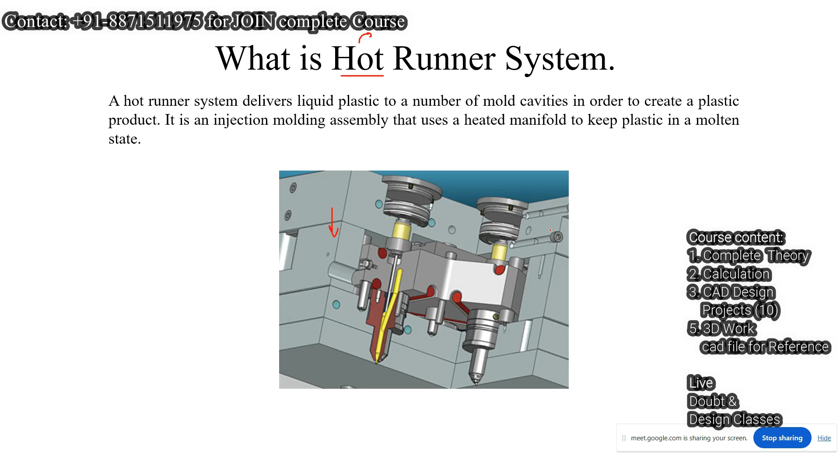If we use this hot runner system, the mold will not produce the feed system, so we will get the component directly. This complete apparatus or mechanism, you can say, we have to select.

In the previous lecture we discussed about the mold which has a manual type of hot runner. We have the semi hot runner, which is like an Indian jugaad, you can say. But that type of mold we cannot use, that type of mechanism we cannot use.

So for this, some companies are working on the hot runner apparatus. We have to select from there. So basically, what is the function of the hot runner? Hot runner means it will keep the plastic in the liquid condition.

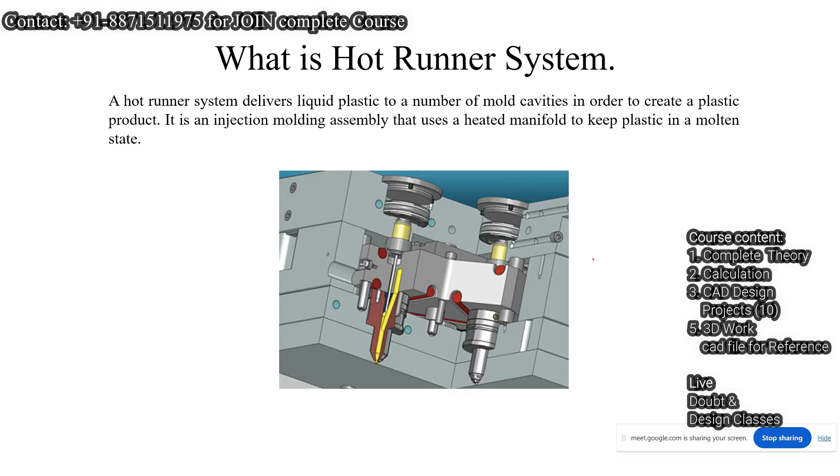So basically, if we use the hot runner system, the mold will not produce the wastage.

Here you can see the element into the hot runner. What is the element which we will use into the hot runner? This is the connector box. What is the purpose of this connector box? Maybe electrical wiring. Yes, electrical wiring. This connector will supply the electricity into this manifold, a complete manifold of the system. And this is nothing but the top plate or the fixed plate.

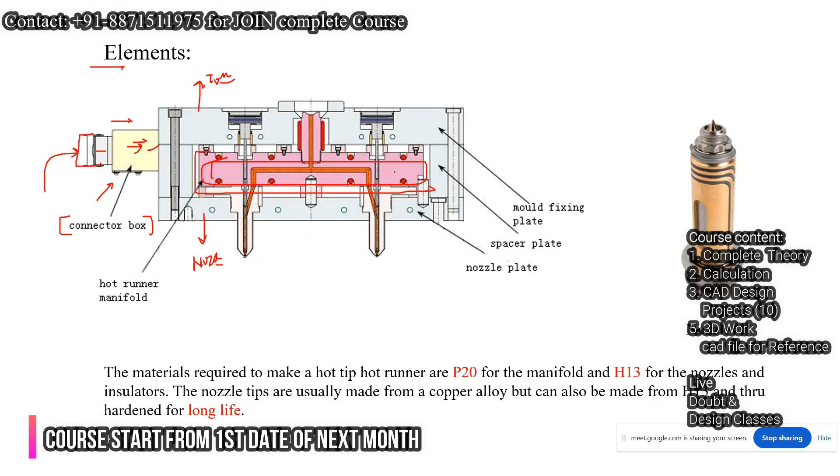Or this is nothing but the nozzle plate. And this whole system which is inside this box is known as the manifold. So hot runner manifold. Into the hot runner manifold we have to use this nozzle.

Now, talking about the material required to make the hot tip or the hot runner, generally we use P20 for the manifold, and H13 for the nozzle. But as I told you, depending upon the company specification or the company catalog, they can use their own material, but they will provide the efficiency for the nozzle or for the manifold also.

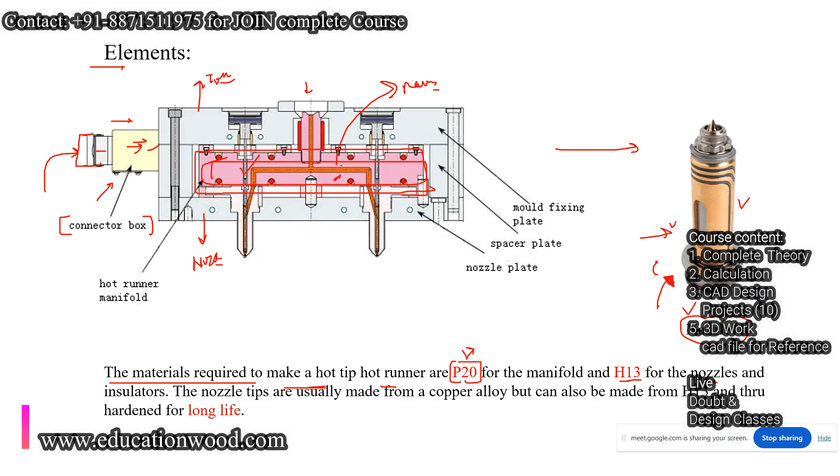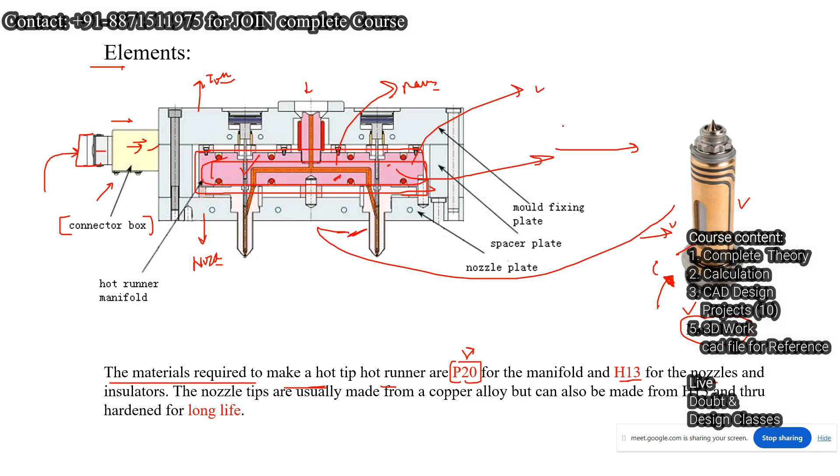So we can prepare this manifold ourselves, because this is nothing but a plate in which we have to implant this nozzle. So the manifold we can create as our housing, but it is quite difficult, though we can prepare it.

But somehow, as I told you, we should take it from the company itself. We should not try manufacturing this because there is an issue of the material, the thermal property of the material. That's why we should take the complete system from the company.

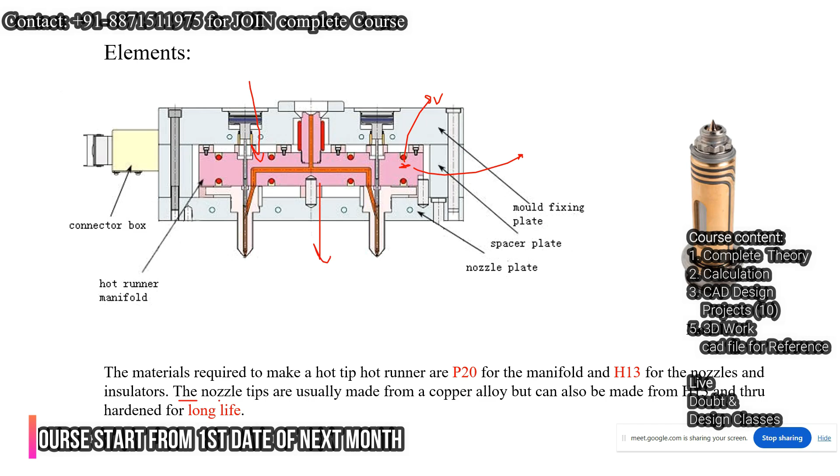As I told you, the nozzle tip is usually made up of copper alloy, see here, but it can also be made from H13 through hardening. If I am talking about the insert, for example this is the nozzle, so for the replica I have to provide the complete insert for this. This will be the insert. So what will be the insert material? We have to use insert material H13.

But for example, if I have to machine it like this into the insert, this machining is very difficult. So for that, sometimes we cannot use EDM machining here. Why can't we use EDM machining sometimes? Because EDM produces heat, and because of this heat, this material or this portion can become brittle. That's why during the operation of this hot runner mold, it can develop cracks.

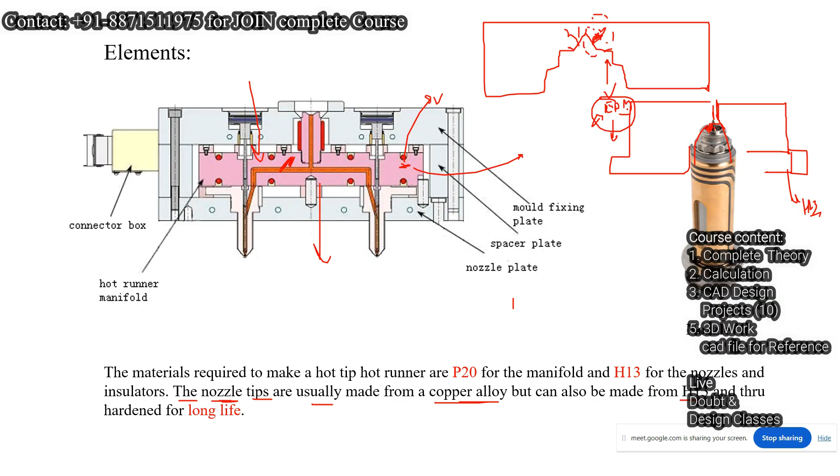That's why we have to avoid EDM machining during the manufacturing of this insert. You should understand these things. Is it clear? Now, as I told you about the nozzle...

So, the general rule for selecting the nozzle or gate - what is the criteria for gate selection or nozzle selection? For example, in a pinpoint gating system, how do we decide the gate diameter? This is the cold gate runner diameter.

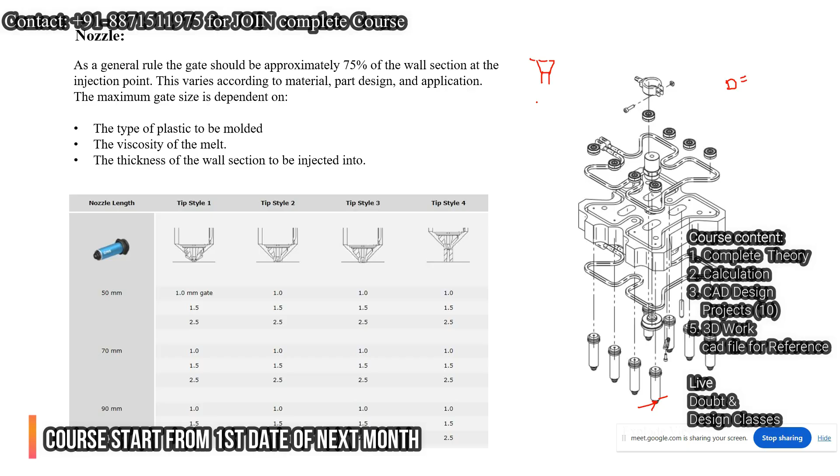So basically we can calculate the diameter. As a general rule, the gate should be approximately 75% of the wall section. For example, if the wall thickness is about 2mm, what will be 75% of 2mm? It comes to around 1.5, so we should take 1.5 diameter.

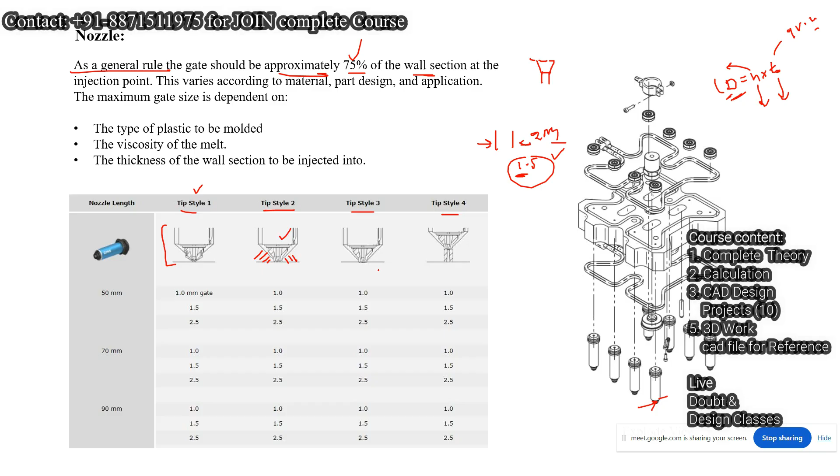So here you can see different types of styles available for the nozzle - tip style 2, tip style 3, tip style 4. Now depending upon the component, we have to use the appropriate style. For example, if we need some space, we use style 1, style 2, or style 3, but here you can see tip style 4 is used for a different purpose.

For example, we have a component like this, and the customer says, sir, we don't want any mark at the top of the component. Then what do we have to do? We have to prepare a runner and provide edge gating.

Where will be the position for the hot runner? See, this will be position 1, and this will be position 2. So basically the material will flow like this.

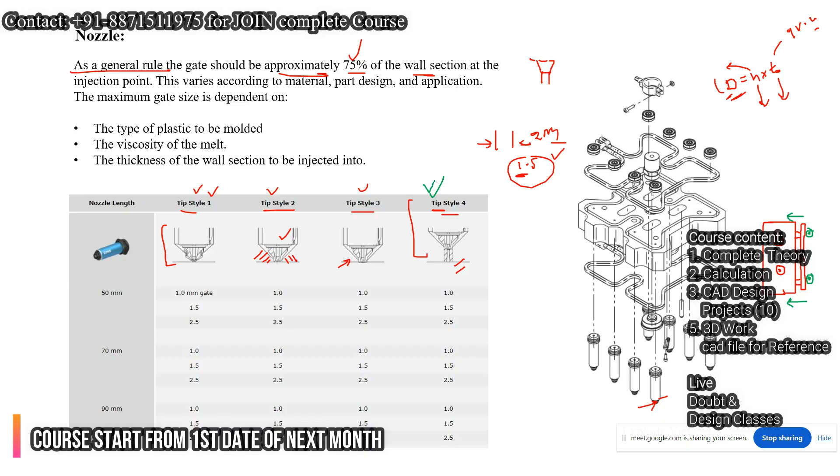As I told you, depending upon the requirement, we have to use the appropriate tip style. For example, if we need some space, we use style 2 or style 3. If we don't need space and want to directly touch the component at 0.5 or 1mm, we can use style 1.

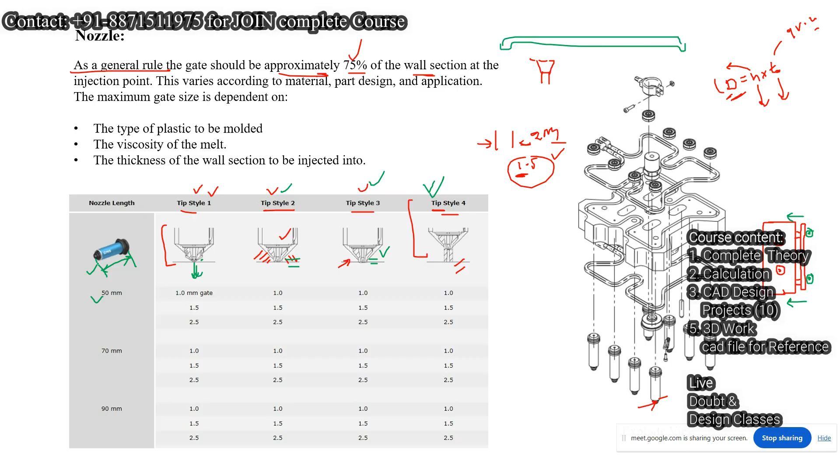Now here, you can see this is the length. This length again depends on the component geometry. For example, if the component geometry is like this, we can use the minimum length - right or wrong? So there's no requirement for more.

For example, if the component has a structure like this, with this kind of section, then I have to provide one nozzle here and a second nozzle here, for example. Then I have to use 50mm as well as 90mm, just as an example - right or wrong?

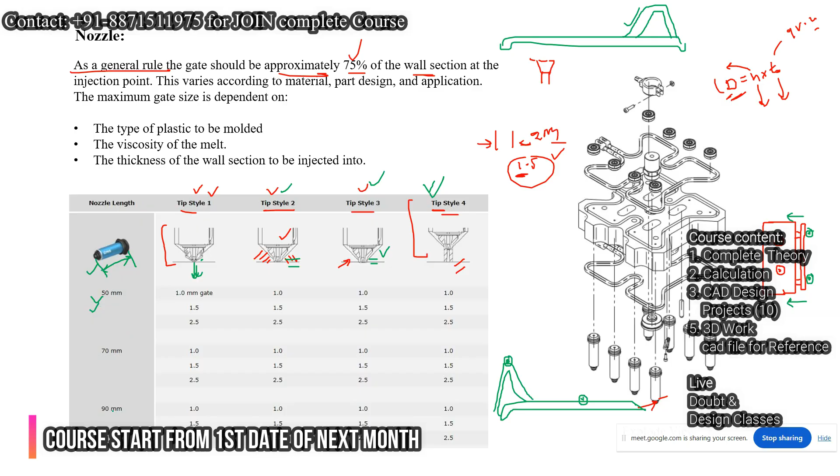So, as I told you, this is the selection procedure. Is it clear? Yes, sir. So we have to take the standard nozzle or manifold accordingly - this is the procedure.

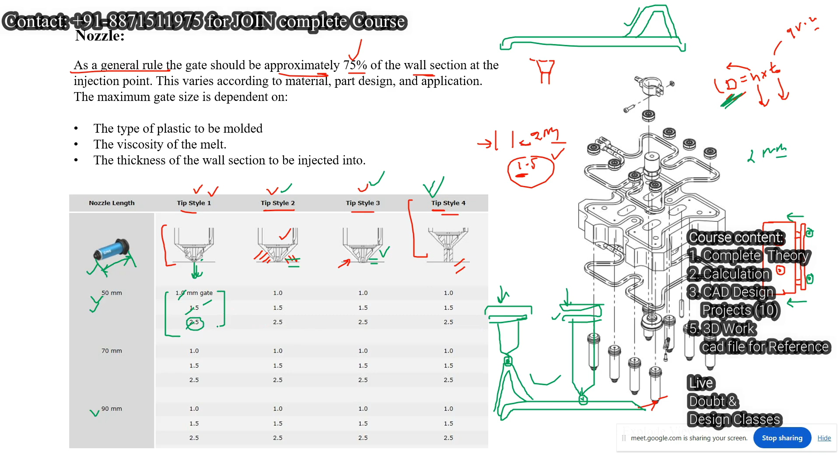Here you can see that gate diameters of 1.5 or 2.5 are available. For example, if we get the D by calculation as 2mm, but we have a bigger part, then we have to use a 2.5mm diameter - right or wrong? Yes, sir. So basically this is the diameter range available for the nozzle.

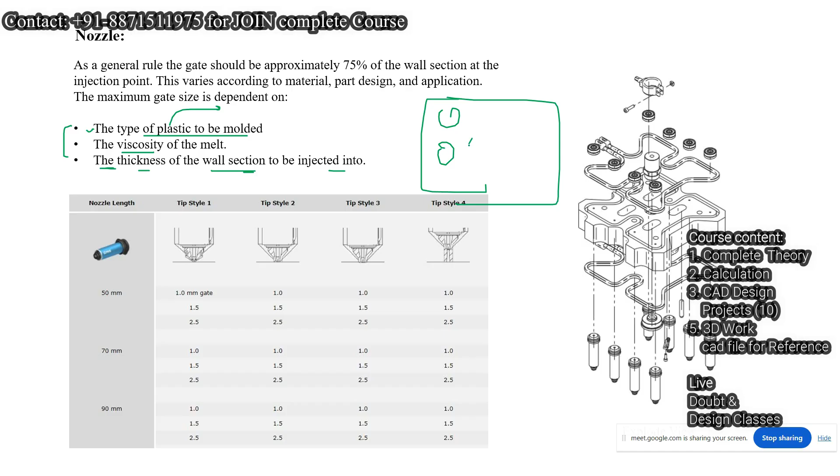Now, as I told you, while selecting the gate for the hot runner system, gate selection also depends on the type of plastic to be molded - depending on the property of the material, meaning viscosity, which is the main property, whether it's low viscosity or high viscous material. Also the thickness of the wall section to be injected, and the geometry of the component. For example, if we have a component like this with lots of features, then we have to use a hot runner there, right?

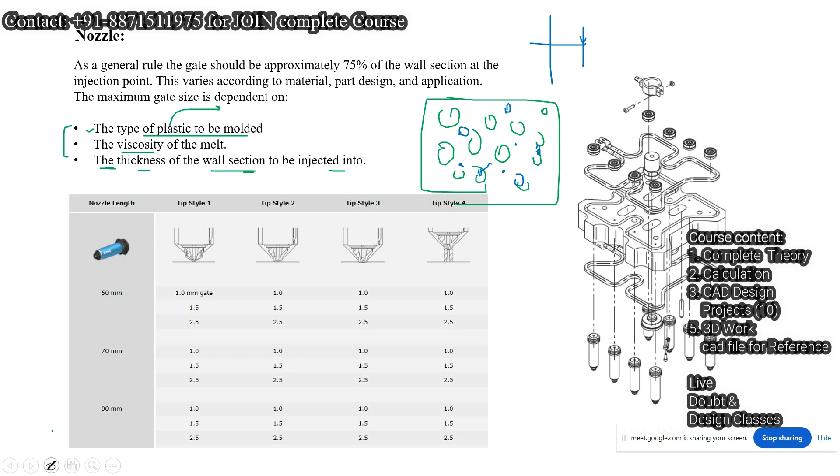We have to use the multiple nozzle system, for example 1, 2, 3, 4, 5. This is the multiple gating system, and a manifold is available. This is the common standard I'm talking about, known as 2 drop - like I section, or 4 drop like X section, or 4 drop like H - depending on the placement of nozzles.

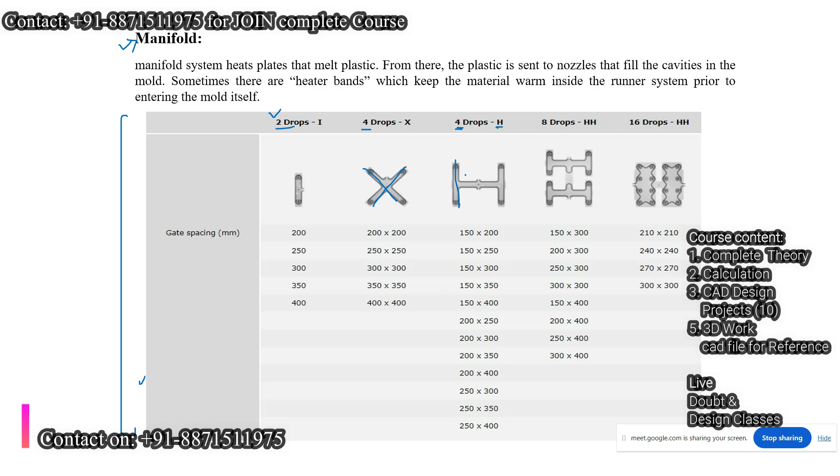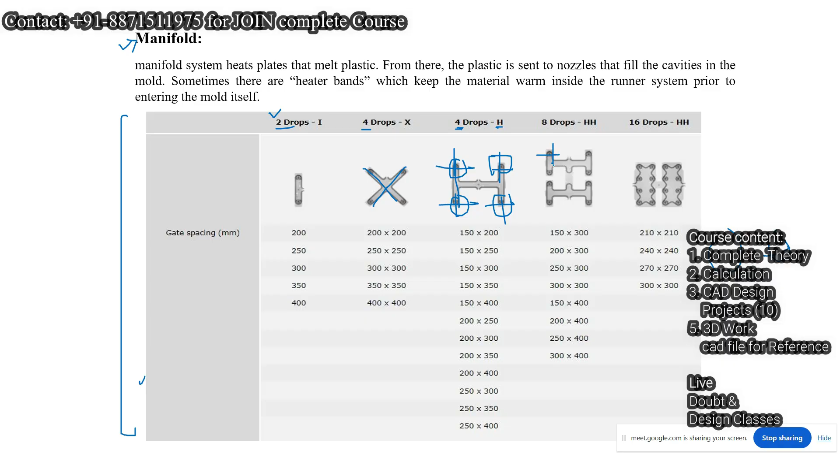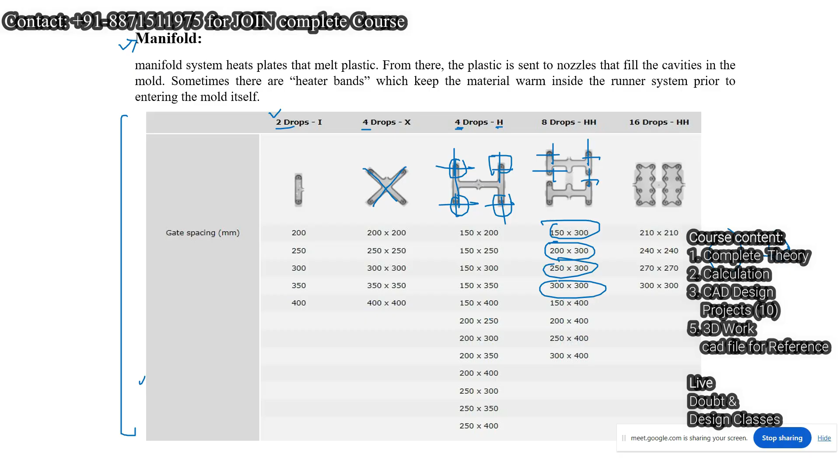We have to prepare the multi-cavity layout depending upon the manifold. So basically we have this PCD. As we discussed about the gear, similarly, since we already have the PCD, we can prepare the multi-cavity mold depending upon the manifold, maintaining this space point to point.

Now, manufacturing stage - as I told you, in the initial manufacturing of this section, the GD&T of this section is very important. Basically, while we are designing the insert for this section, we should know about a few important GD&T symbols.

We need concentricity, and we need perpendicularity, for example, for the proper butting or fitting. This is very important, and this length from this point to this point is very important. Depending upon that, we have to decide the height.

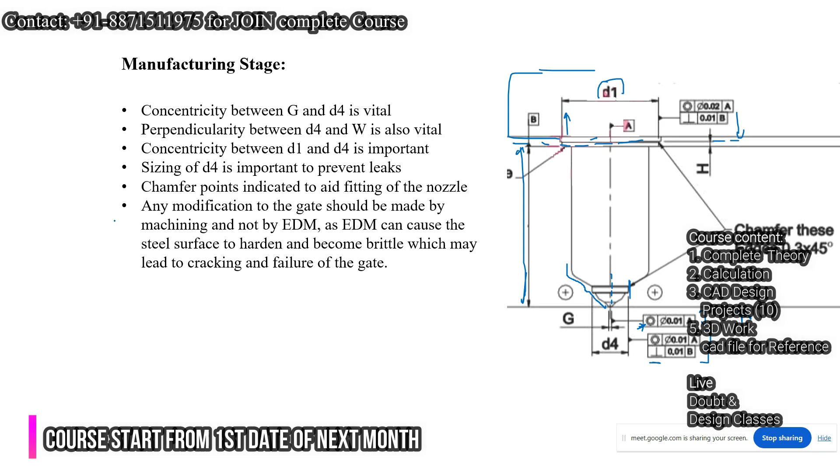Then the upper part, which will be touching the nozzle and the manifold - this is the important point. We should avoid EDM here, as it can cause the steel surface to harden and become brittle, which may lead to cracking or failure of the gate system. So this is a very important point.

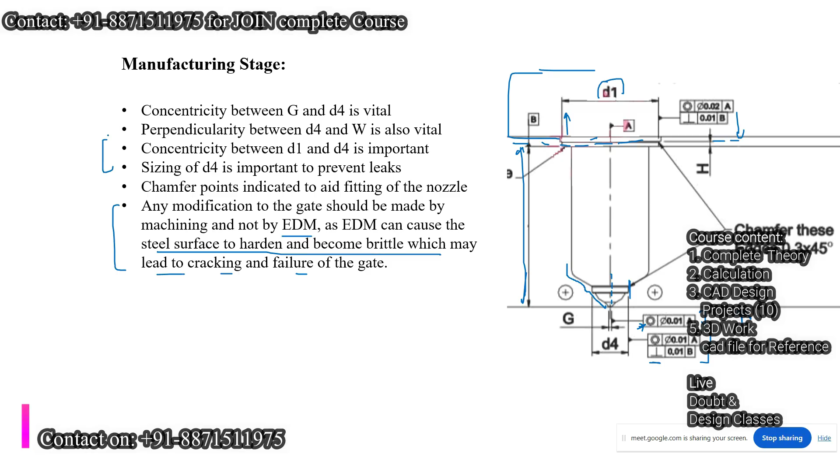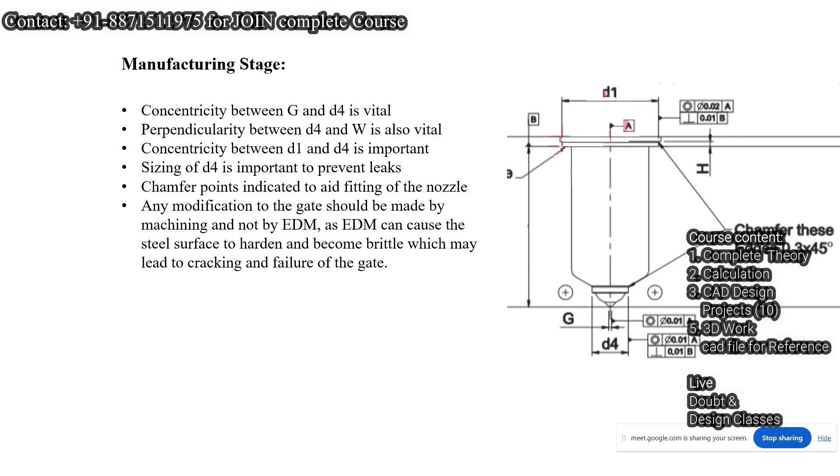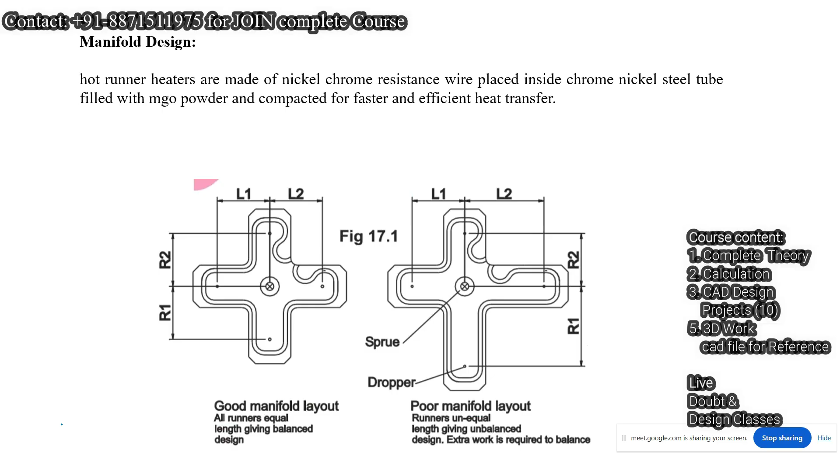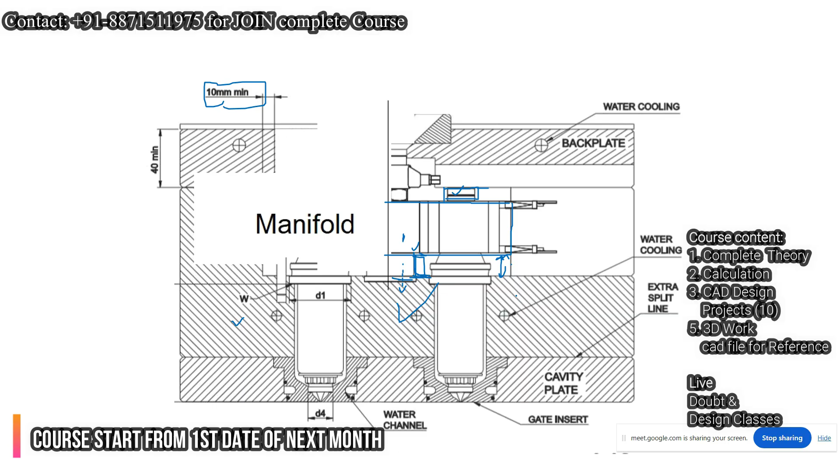What is the reason? Because if the manifold is in hot condition, and this hot manifold touches this plate, then it will transfer heat to this plate, and because of that some problem may occur.

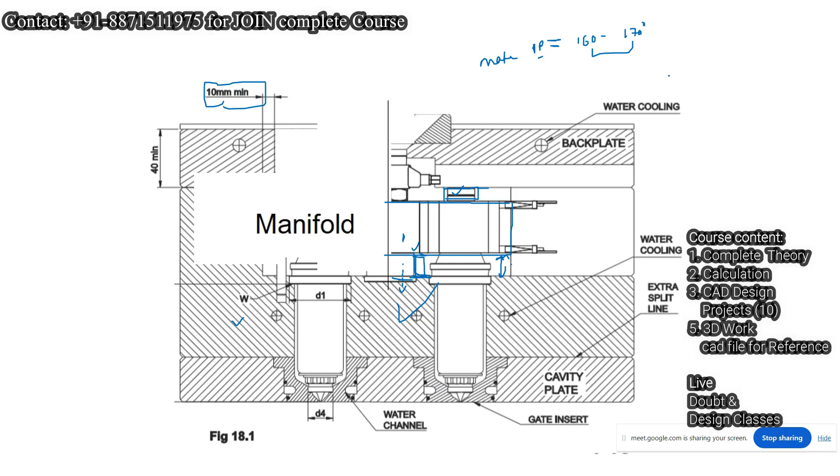But how much temperature would you expect in the hot runner, sir? Maximum, how much will it go? Depending upon the material - for example, material like PP. What is the melt temperature for PP or ABS? For PP, the melt temperature is 160 to 170 degrees Celsius - this range may depend on the environment also.

So basically this temperature we have to maintain, and there will be a control system also into the hot runner system. So that's why this is very important.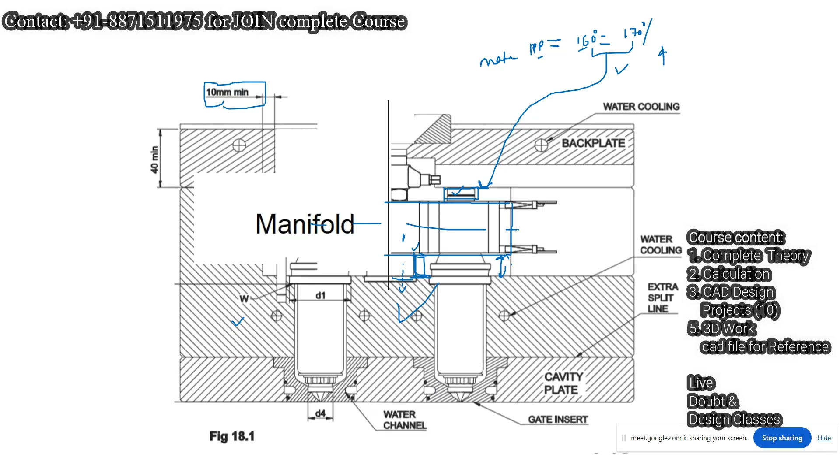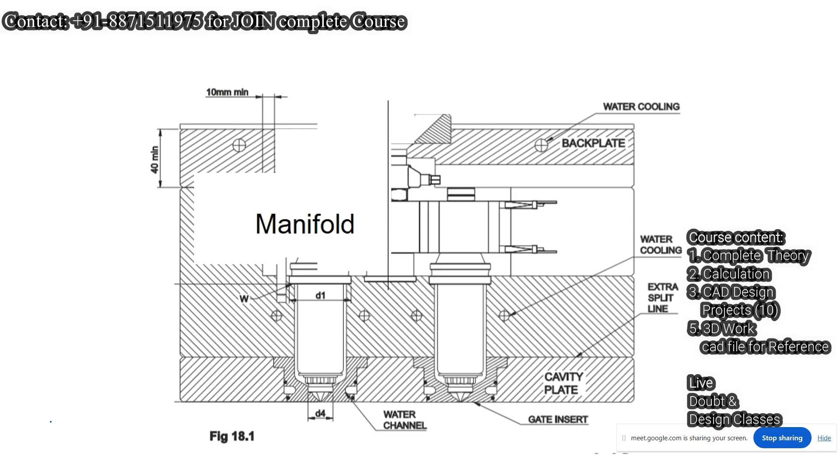So that's why, for example, if we heat more than 170 degrees, the material property can be changed, right? So basically they will not produce a uniform component from that. Yes sir, and this is very important. That's why we have to use the hot runner from the company, and we have to select the manifold, nozzle, and everything.

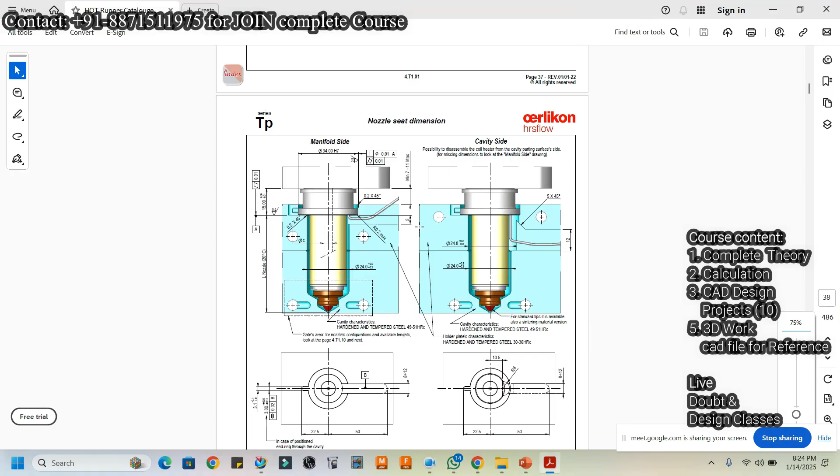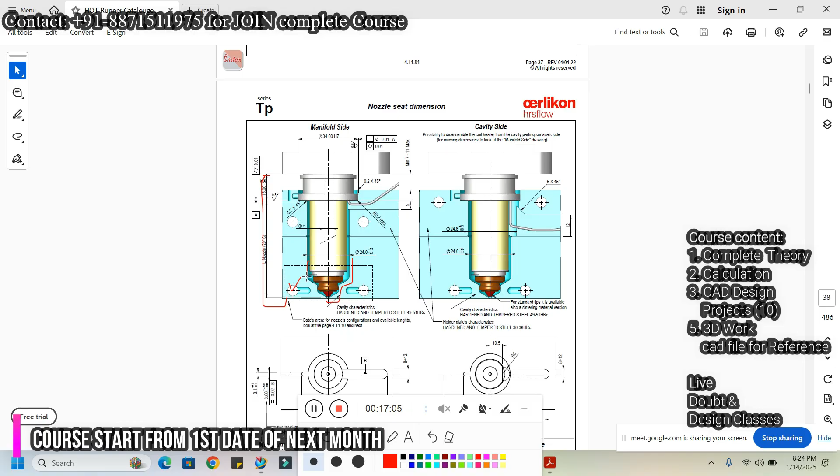So here this is the hot runner system, which we have to select depending upon which company we are using. For example, we have this catalog, like Oerlikon HRSflow, so we have to give the specification of what type of nozzle or manifold we need. Depending upon that, into the catalog they provide all the dimensions required for the design engineer, because they have to design and manufacture this insert. All these things are provided by the company.

See, this is all the parameters. This is a very lengthy process basically for the design engineer. For example, if they are dealing with the hot runner, it means they should spend lots of time designing that, right? And see here, 15 mm from this point to this point.

Okay, so here you can see that. So we have to discuss, there is a design team for manufacturing that type of hot runner, particular hot runner mold, right? See here, 0.0 minus 0.01 means 10 micron. See here, and here, this is the length.

Okay, and here you can see that. Right now, see, yes sir, so lots of things here. For example, this point to this point is a 5 mm distance. So here we have to maintain this 0.2 radius maximum, so basically we have to give the clearance there.

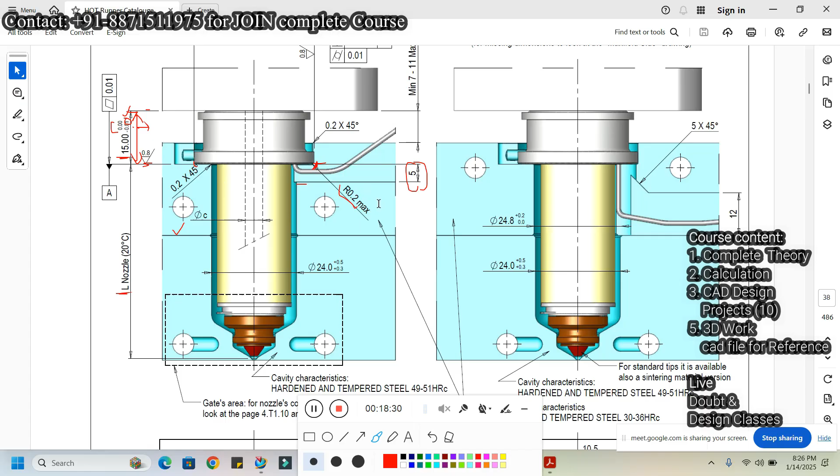See here, you can see that, this is the... and this is all the specification. Depending on that, we have to discuss about that also. We have to discuss all these things, right?

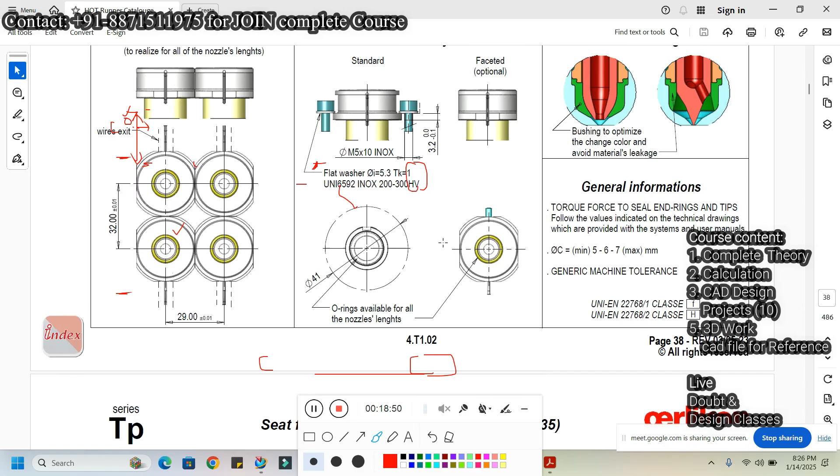So basically this is the nozzle. Now if I am talking about the manifold, see, now see the manifold. Now see here, see, like this.

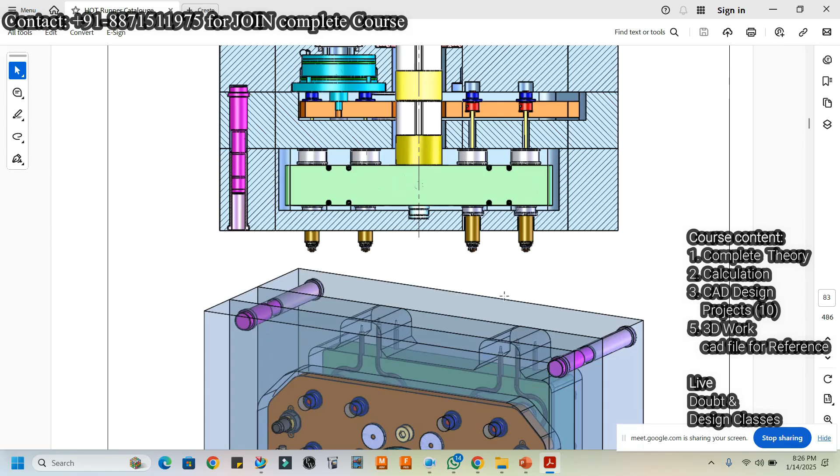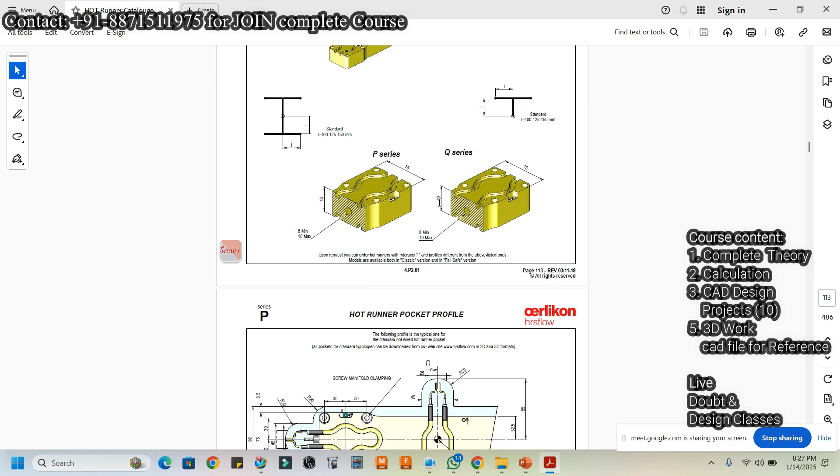Just a small doubt, it's quite complex, right? Yeah, but this thing, will they suggest this thing? I mean, which thing? I mean see, yes sir, what about manifold material sir, what kind of material should we use?

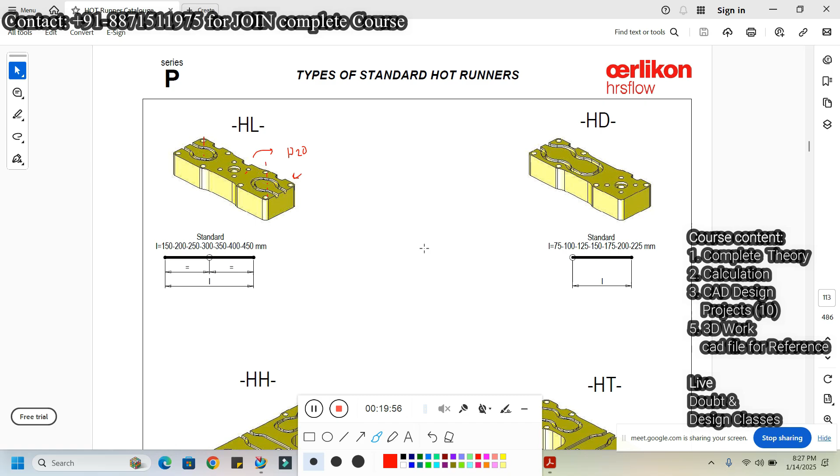So as I told you, they are using material similar to P20 for the manifold. This is the manifold here, so this is the location for the... No sir, so as I told you Vignesh, this is the complete selection procedure. Is it clear? Complete selection procedure.

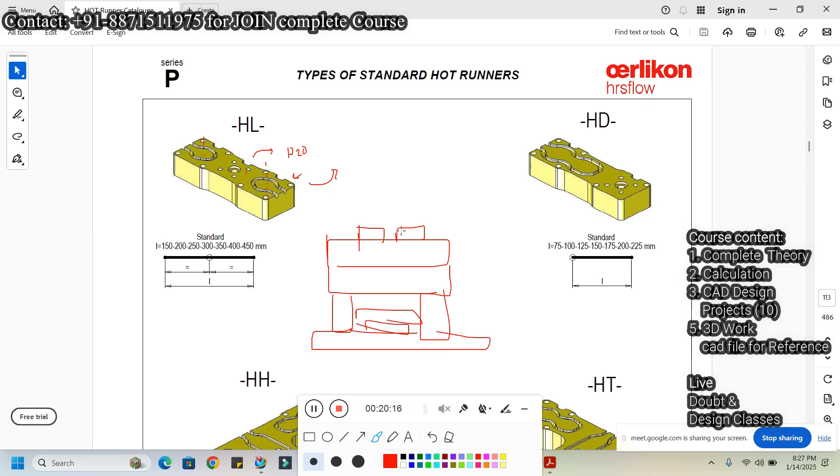So basically, for example, we have prepared the complete mold for any type of component. So we have to prepare the complete moving half portion first of all, right or wrong? Then we have a component, like this. So this complete portion will be the hot runner system. Okay, so basically fixed half will be the hot runner, moving half will be the another part that will provide the ejection. So fixed half will be the hot runner system.

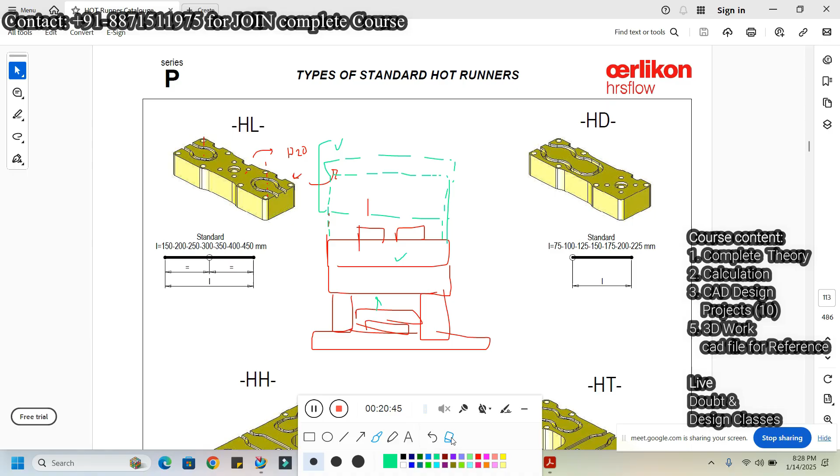See, this is the manifold, and it depends upon the component. Now here, see, this is the H type of manifold. See, here this is providing the distance from this point to this point. This is the L, which can be 100, 125 or 150 mm, which is the standard depending on company norms, right?

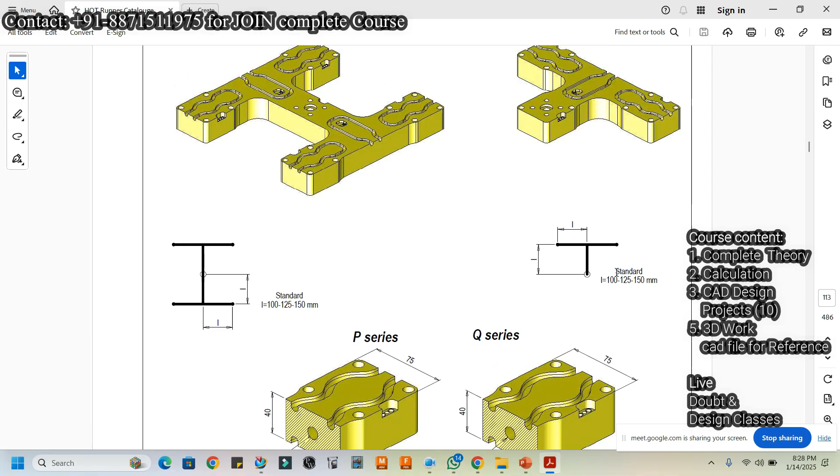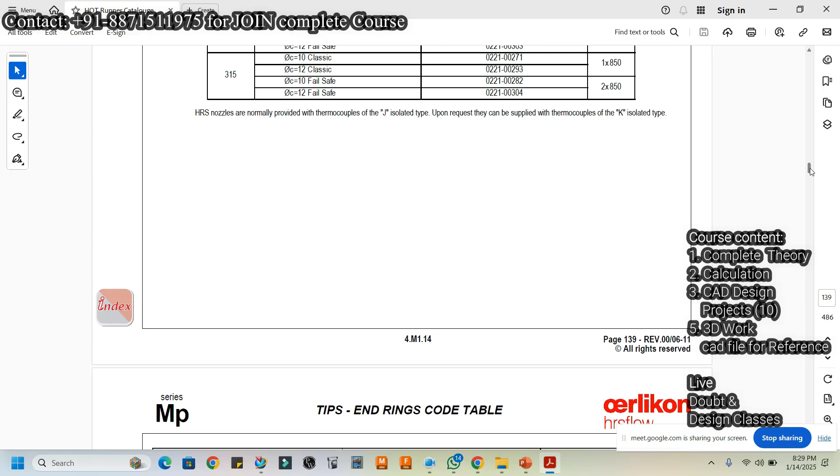See, from this point to this point, this is the 75 distance. So depending upon that, we have to design our complete spacer and the top plate and the cavity plate, right? So there are lots of specifications, length, width, and number of cavities depending upon that. Lots of specifications of the manifold as well as for the runner. So we have to select that depending upon the component, right or wrong?